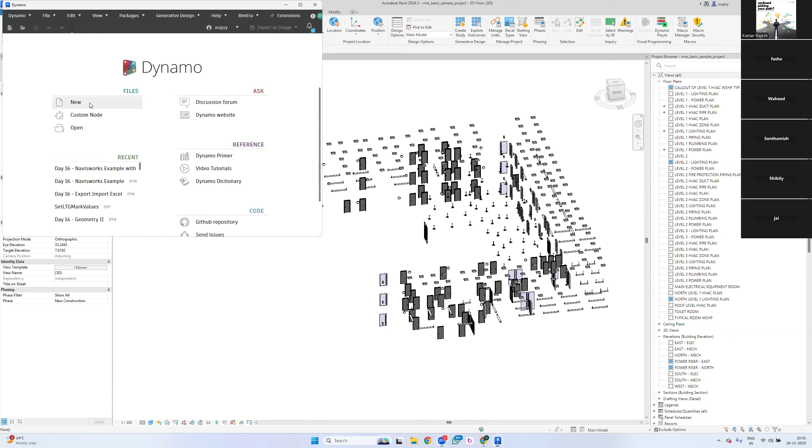If you realize what things can be exactly done with the help of Dynamo, you'll have that specific attention. This can be done with Dynamo, this can be done with the API. So where API is required, where

Dynamo is required. Today there is a person who texted me personally saying, Rajesh, I want to go with Dynamo and C Sharp. Arre baba, both are two different ways. They're not at all the same way.

If you really want to settle your career as an add-in developer, you no need to learn this Dynamo and other things. But if you want to settle in BIM as a BIM modeler and coordinator and then manager, and if you want to do all this kind of stuff, then if you want to be on the same tool, on the Revit tool, then you have to finish level 1 and level 2. If it really makes you more crazy about driving, writing the code, then you can go with level 3.

So this is my personal suggestion for everyone. The package is not exactly the same package what we expect for level 3 users. Level 3 is something completely different, handling 3-4 newborn babies at the same time. Just imagine, if you're a parent, if you're a father or a mother, consider handling 4 newborn babies at the same time.

What if I have DWG lines and convert them to Revit detail lines, I mean to Revit elements as well? For example, if I have a line, how to convert that line into walls? Like for example, even that was an add-in actually. This is an add-in, bro, the one we developed, it is an add-in. I mean, if one client comes to me and asks for

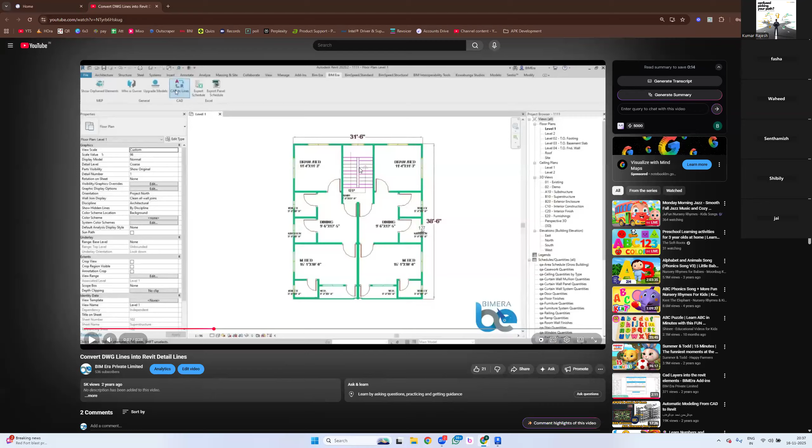Okay, so in BIMERA, these are the add-ons we have, and there are many. The base to develop the add-on is again Dynamo. Seriously, from the nodes I can see the C Sharp code and I can ask. That time we don't have any GPT.

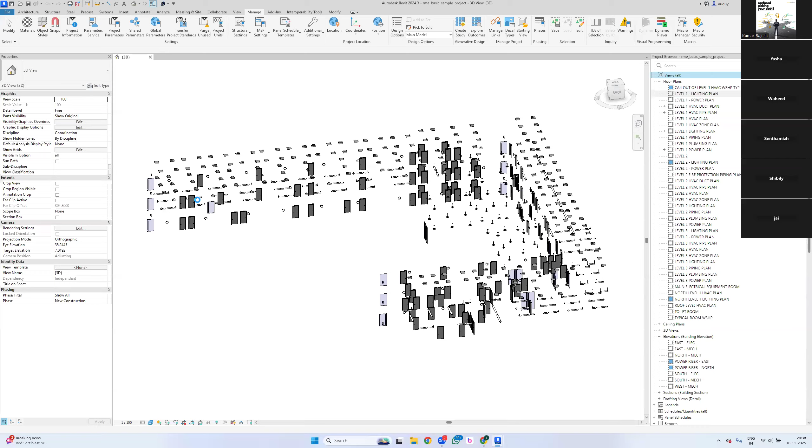Today I'm going to show some short example using API, I'm sorry, using AI, we are going to write some set of scripts. Okay, it's really simple, not that tough. Exporting panel schedules, and for example, if I want to convert something, let's say, how actually Dynamo is understanding.

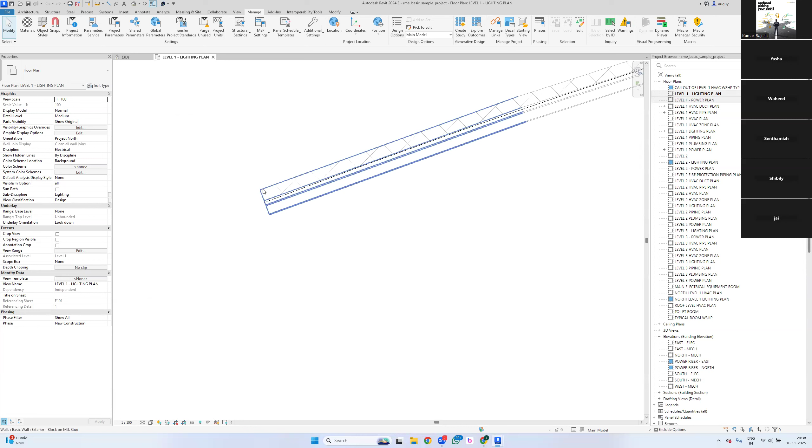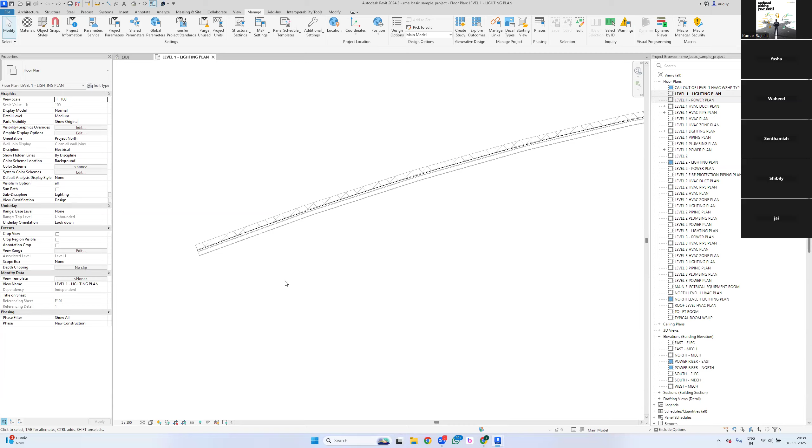Someone asked me, Rajesh, what if I have a curved wall? In 2021 it was not there, so what is the exact process? This part is just a wall, this part is another wall, and the base is actually a curve you can see in the back. That's a curve, seriously, done with the help of Dynamo with complete accuracy. If someone asked me, Rajesh, can you build the entire project from scratch with the help of automation, can you do this as a pilot project? Why not? Everything can be done, seriously.

Let me draw some lines here. There are lines, no? There are lines actually, see, these are just dummy lines.

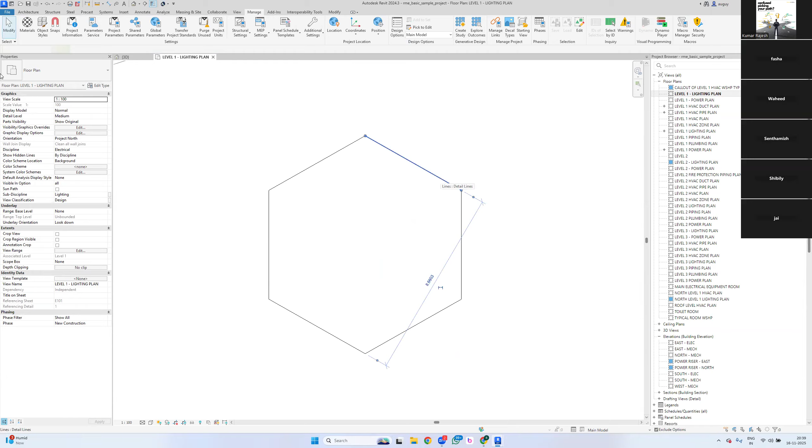Now I'm asking, try to understand what I mean. Dynamo is not a robotic science, even you can learn it yourself. But there are very wrong perceptions happening in the industry that Dynamo is very tough. That's why I explained yesterday, Dynamo is not tough. Today I'm going to show you why it is not tough.

Very simple. So I want to play with multiple model elements, and this process is actually called element selection. Element selection is a very important concept in the entire training because I don't want to disturb any other element apart from the ones I need. I mean, except I need only 10 elements out of 1000, so the rest of the 990 should not come into my context. Understand? So how do I exactly filter the 10 elements out of the 1000? That's what is called element selection.

It's very, very simple. It's very simple. At the same time, I mean, it is not simple. But the way I explain it, it's going to be very simple. So select model elements, it is asking me to pick, it's a manual selection, by the way.

Now, I know there is a process called Arre baba, Mr. Dynamo, I have lines actually, but it is in Revit. But I want to make something happen with you. So I want you to convert these lines into curves first. So element to, I mean, Revit to Dynamo transformation, again from Dynamo to Revit, again another transformation. So this concept is called element to geometry conversion, and geometry to element conversion. Understand, whatever it is, a line or a duct or tray or pipe with slopes, anything, same process.

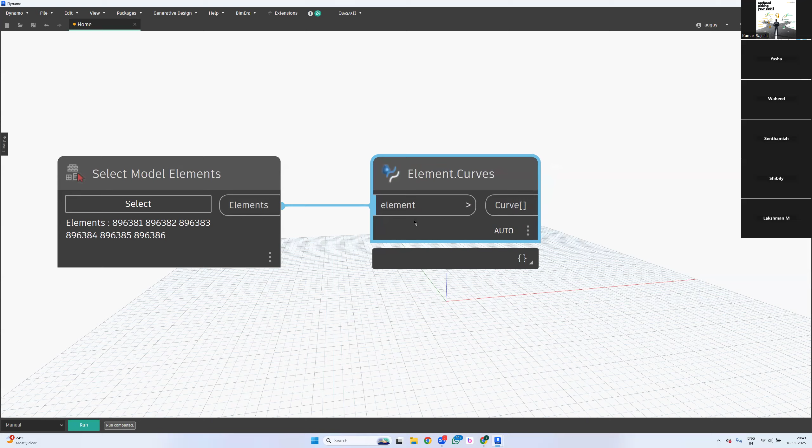Now see, I have curves now. So this is not a Revit element. I have asked to convert. I want to do some set of processes within Dynamo, and finally convert these curves into walls in Revit. So two sets of processes: element to geometry, geometry to element. Very typical process, you can't find my kind of explanation anywhere else.

The reason I can exactly teach you is I have learned six different languages. I'm good at six different languages to teach you, and the way I did in R&D, I generally don't sleep at nights. I don't have this kind of insomnia or something, but I don't sleep late nights. I mean, if I am eager to learn something, know something, this is okay.

So now what I'm saying, I just want to draw a wall, convert a wall, but I know, I have the curves. I have the curve and I know the height. See what it is exactly saying.

So whenever you started typing 'by', consider you are creating something. Even Dynamo will understand, okay, this guy is about to create something. So it will show every damn thing which creates. That is the power of searching by.

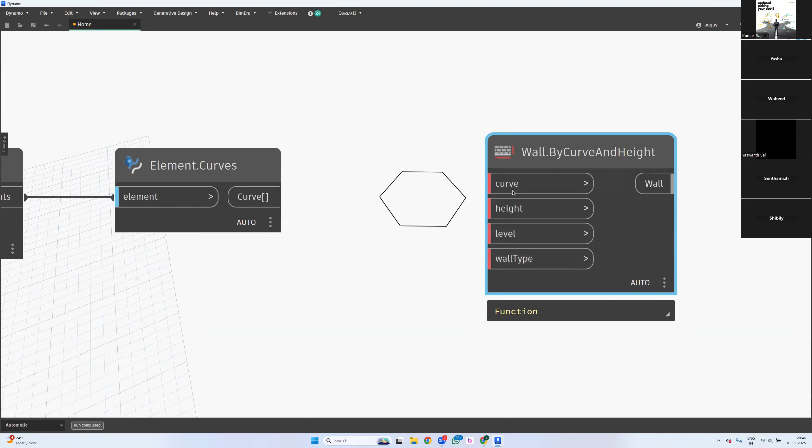So by curve and height, it means I know the curve, I know the height, I know at what level it has to be, I know what wall type it's supposed to be placed. So I know the curves. So what it is exactly, I have curves. So can I connect this to this?

So from, can I connect this to this or this or this or this? To where curves, I have to connect to the curve. The reason it is actually returning the curves, but it is expecting the curves at the same time.

Is it? Is that really a rocket science? No, no, correct, very simple. If your kid is expecting ice cream, bro, and you bring some sweet, chocolate or something, does she accept it? No. The same way, so this is it.

It contains like 10 lines of code. It contains like 90 lines of code. So to make this execute 90 lines of code, you have to connect that exact pair. I hope you know the puzzle kind of stuff.

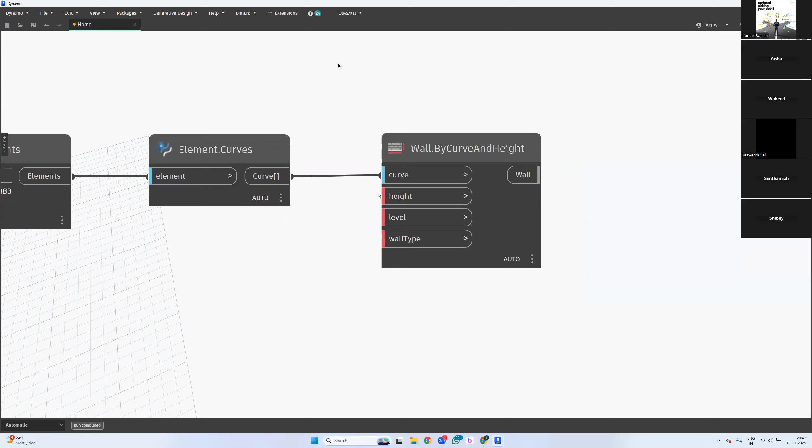Okay, fine, so height actually. So I know height. The only problem with this is actually we don't understand. We know what this is expecting. We can understand by reading it.

You did some sort of research very well. You have gone through some YouTube videos or Udemy videos. You finished like 2 or 3 courses from Udemy also. I can tell you this, it's a confidential thing, but still I can say most of my students are Udemy users. Seriously, they've gone through already, but no luck, because they don't teach concepts.

They teach scripts. If you learn a script, you will be able to play with only that script, not the concept. Understand? If you have seen how to build a bridge in just 1 minute, or 2 minutes, or 2 hours, or 3 hours, you can do the same thing. In the interview, if they ask you to create a tunnel, no, you can't, because you practiced a bridge only. Is it clear? But what if exactly to create a bridge, what are the things required? Root concepts.

The root concepts, at least you will finish 80% of the things if you have the root concepts. Understand? So don't be more foolish when you're learning these kinds of stuff. Don't waste your time, because I was a big fool, seriously. Even though I invested a lot, my investments were always on the wrong track because someone said this. Again I went and invested in learning a new course, another course. This is the way it went completely. So I don't want to do those mistakes. Seriously, if someone comes to me and asks, can I go with this?

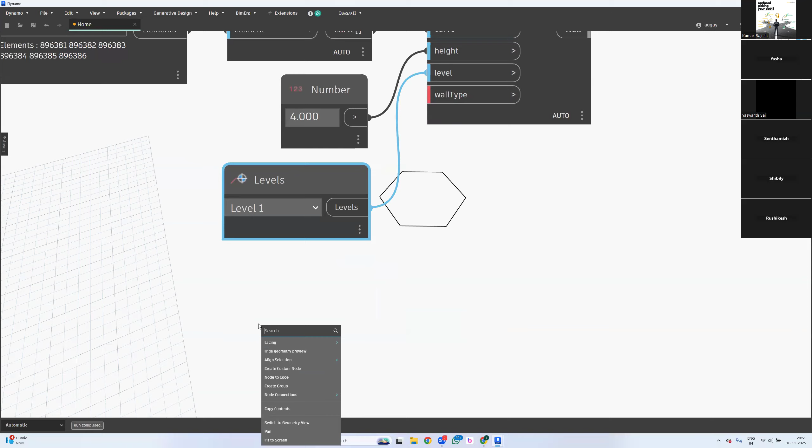There are a number of ways again. Levels. I tried this method, I'll pick level 1 and connect this to this. And this is expecting wall type. Pick a wall type. I'll just follow MW 17.5 and connect this to this.

Done. So it was expecting something like curve, height, level, and wall type. Now in return it shows... what happened here? What are these?

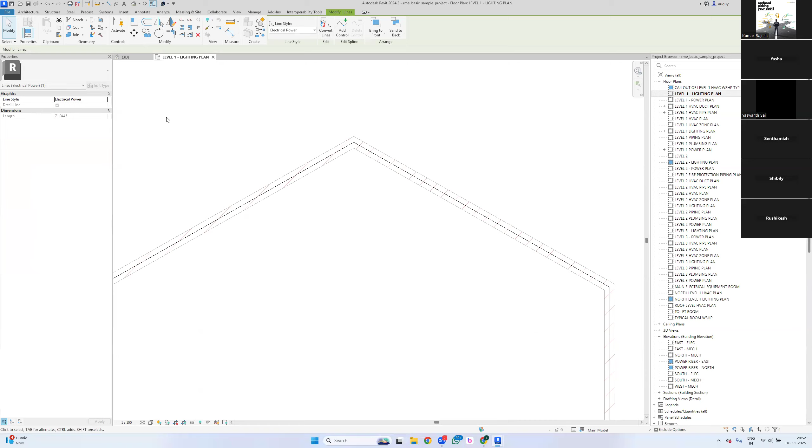Element IDs of all these walls. Hit escape, the coordination mode. This is a curve and this is the wall, and the height of this is unconnected 4 meter, and that is MW 17.5. Are you clear, everyone?

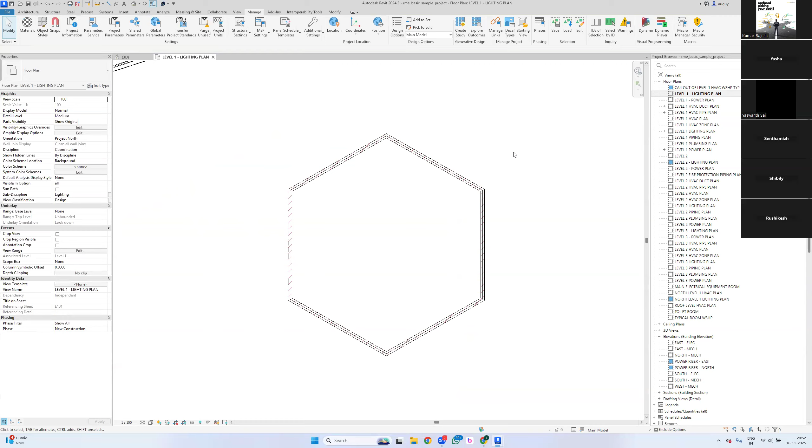Are you clear everyone? What if I have lines only but coming from a CAD file? Same process. What if I have the curves? I want to draw a duct.

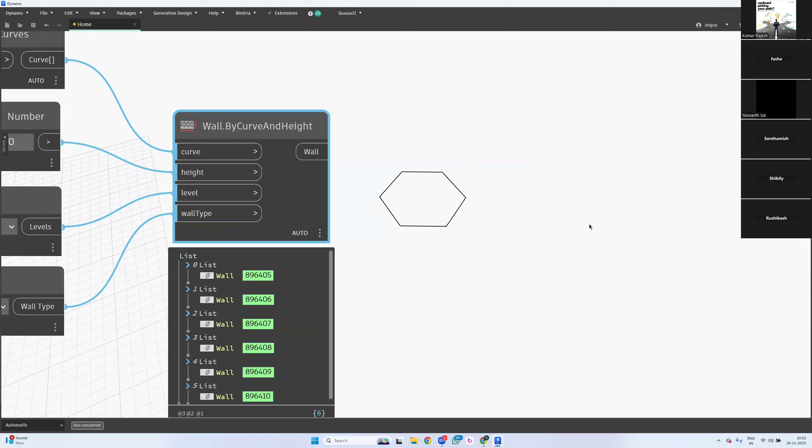Very simple. Duct dot by curve. Duct rectangular by lines. What is it expecting? Same repeated stuff, nothing else.

Because if you have seen something for the first time, you'll definitely get scared. But if you keep seeing the same stuff with different data, you lose that scariness. If you see a ghost for the first time and you feel it's going to harm you, but if it just comes and sits beside you, doesn't pamper you or do anything, just observes what you're doing, next time if it comes, do you really get scared? No. Of course generally they won't do such things, it's just an example. But you won't be scared when you see something for the second time. So even Dynamo is such a thing, bro, seriously. It looks scary, but if you understand the concepts behind it, it's very simple.

So what is it expecting? Lines and curves are nothing but anything. I'll just pick this lines. Oh, duct type, here it's expecting wall type, here it's expecting duct type. For ducts, there must be a mechanical system type, correct? There must be a mechanical system type.

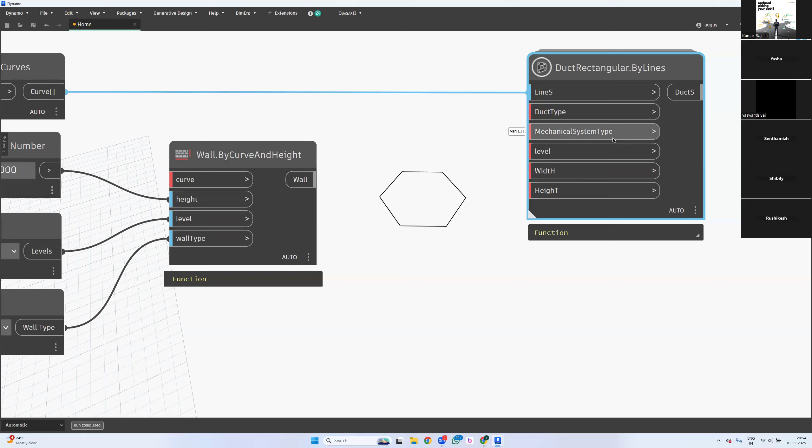So I have to connect the mechanical system type, same as this drop down. And level, same level node again. I'll connect this. Width.

When you hover the cursor, of course it isn't saying anything, but we have to apply some common sense. Width generally in the number format, so I have to connect a number. For what? For the duct. Duct has a width and height, so 400 into 400 or 300 into 300 or something. Am I right, guys?

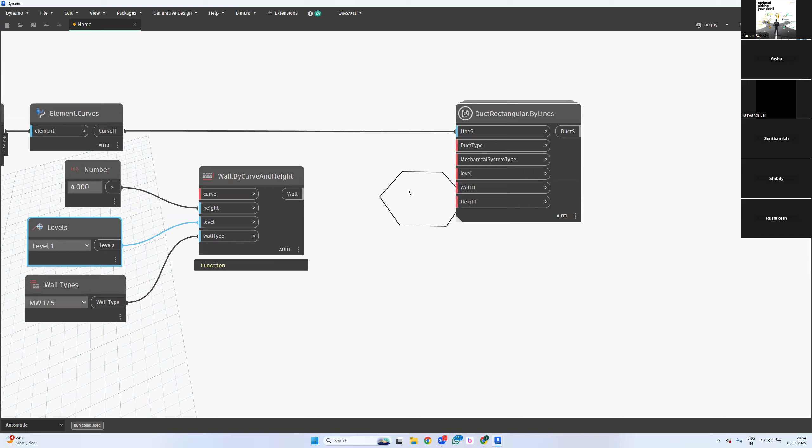Yes. So can I convert the lines into ducts easily? Same. What if, trace, oh, cable tray. Same thing again, tray by curve. Again same stuff, where is the cable tray line? Where is the cable tray element?

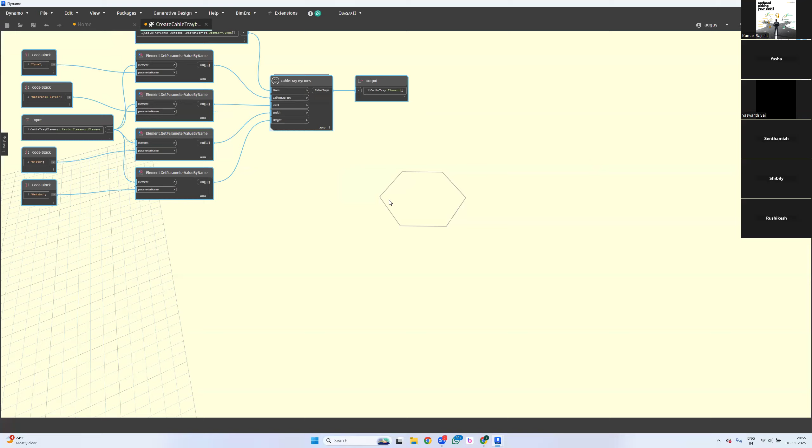Here there is a problem, this is not asking for a width and height. So if you double click on this, it will take you to a different yellow color background. Yellow interface, okay, so here you have to adjust the width and height, whatever you need. And the base is cable tray dot by lines.

Copy it, copy it, and paste it. Simple, see, you can try the same stuff with lines.

Cable tray type, level, width, height. What's wrong in it? Similar. Isn't it? Doesn't it really look kind of scary, bro?

Nothing, okay. The only reason I generally suggest, if you're my student, is to exactly follow the way I'm assigning you the tasks and R&D, no other R&D required. I don't let you do your own personal and idiotic R&D. You have to exactly follow me if you really want to become another me. Understand? Okay, if you really want to write such stuff, okay, very very simple, Dynamo. I don't want to scare you, and there are no other tutors who can teach like me. I don't tell you all this stuff, but frankly, it is true.

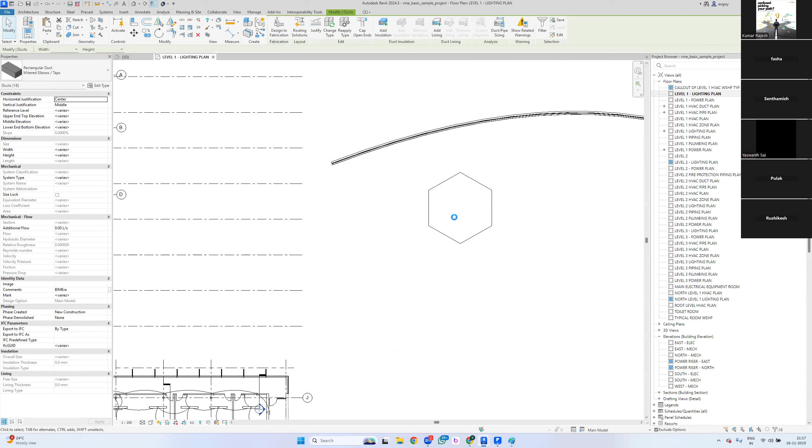What if I want to pick all those stuff? Very simple, Select in Revit again. Something like connect this to this. If I go and check, it shows like 18 elements got selected.

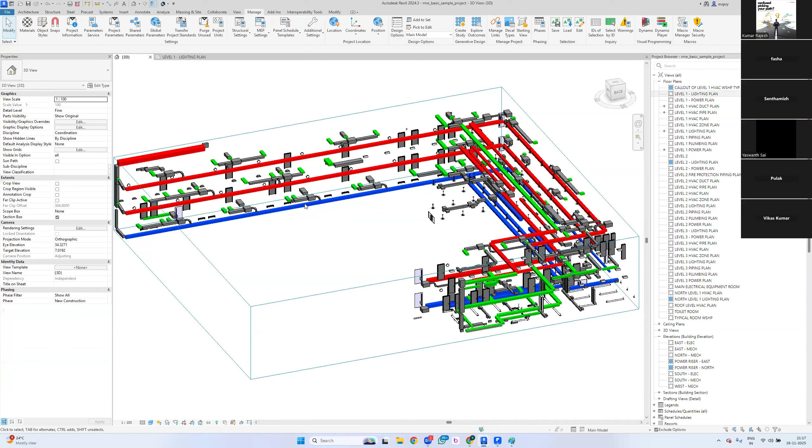What if I just simply click on selection box? I see those. What if I simply connect to this? So there's 18. I can see these are the only ducts we have.

So for these ducts, I just want to split it into two parts or three parts, or else I just want to place the wall duct supports. If it is about 7 meters, I mean exactly 3.5, 3.5, or else like 4.5, 4.5. This is the way I just have to play something.

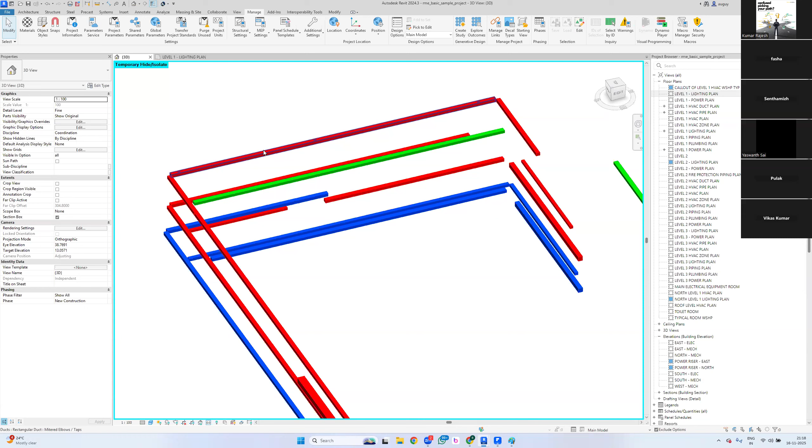So these kinds of things can be done, and this is what is called dot notation. It's not at all complicated. I'll just show you some dummy example. Archilab.core.datetimes. If I want to access this Archilab.core.datetimes.fromUnixtime, that's it. That is what dot notation is.

There are, I mean, it's just I'm explaining you to make you understand. It is simple the way it is, but the same concept has to be explained for almost like 6 hours. It means just try to understand how deep I'm actually teaching into this.

Okay, custom node. You can create your own custom nodes for no reason. For example, I just want to convert this into a custom node. Very simple. If I want to convert this entire thing into a custom node, how do I do that?

How do I do that? Control C, file - in a matter of just a minute, not even a minute, I can create myself another set of nodes like this. Seriously, just file, new, see custom node. So, get ducts for duct supports or something. It's up to you the way you name it.

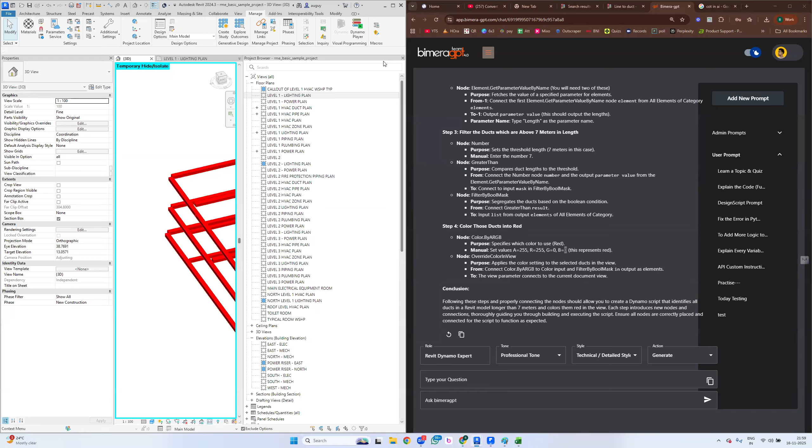When I connect this, all those elements - there are total 32 elements - now they are in red color. Guys, do you see that?

What if I change this to blue? I would love to change this to green, and this to this - I'll go and check. Now they are in green color. Guys, are you clear? Yes, sir.

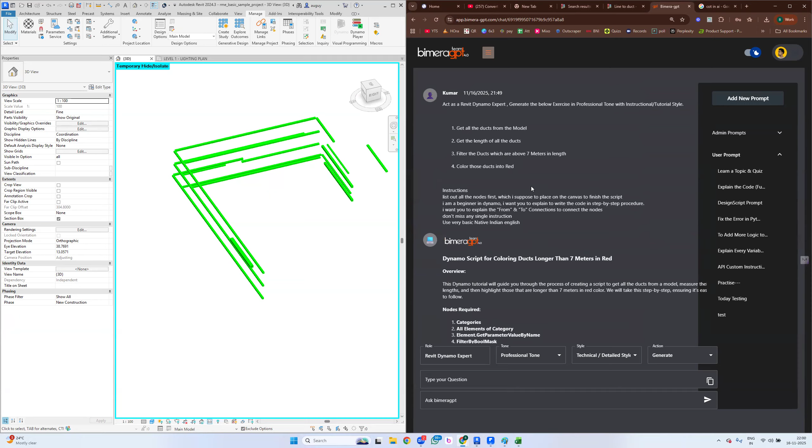We can simply follow the instructions it's giving me - nothing, but of course it will take a lot of time. I could explain the same concept for 2 hours, so the same content cannot be explained in just 10-15 minutes. I hope you understand, because what the exact prompt engineering and LLM models are, how it exactly works - I'll show some AI examples and all that stuff.

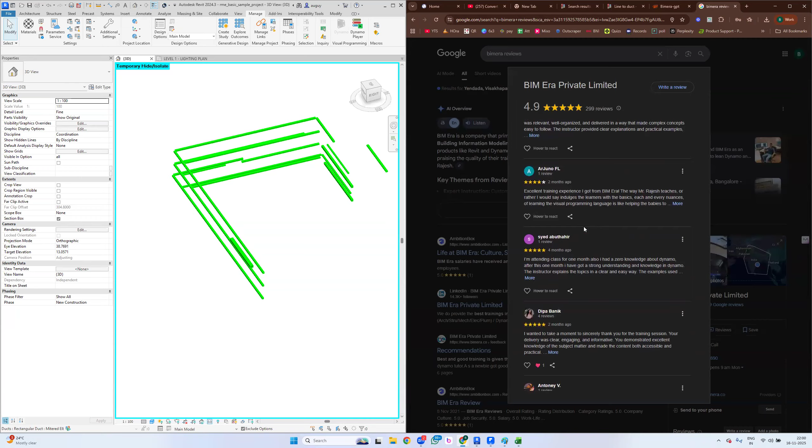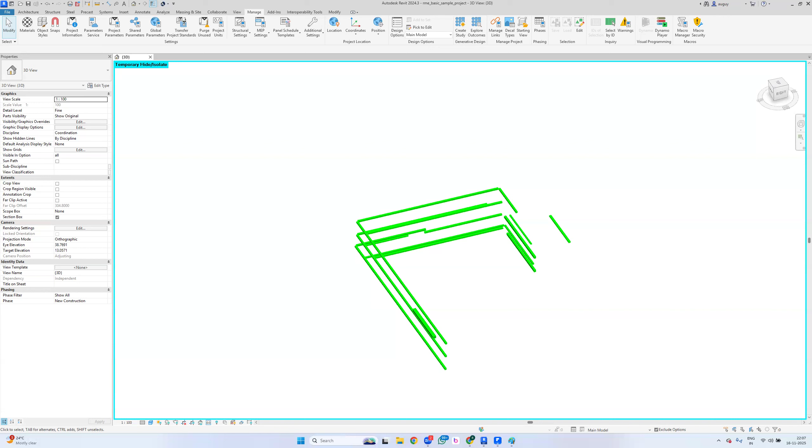Tell me, Patra. Actually, I just went through your posts from yesterday and today. I'm working in the architecture domain, complete architecture. I'm a BIM manager working in the architecture domain, so I'm just looking for automations. I tried to find some of your students who already completed from there.

I think you might have known Santosh Chavan, right? That was long back. Yeah, long back. Through him, when he started joining that time, he told me, but then I didn't get time to join. Now I got the chance to join.

My question here is, in the architecture domain, whatever automation is going to be used in future, that will be helpful for me. I want to join the course, that is one thing I'm looking for. Come on, continue, finish your point first.

How am I going to use this for architectural things, because I'm working from a BIM manager and BIM coordinator point of view. I'm working in Bangalore, so that is one thing. Second thing, like fee structure, whatever fee structure you're telling for level one, two, three - do all three need to be paid at a time, and what is the total cost for all three?

No, no, don't look at level 3 for now. I generally don't suggest anyone that. Frankly, the reason is I have trained almost 2,500 candidates on Dynamo. When it comes to API, consider it's around 1800 plus. But when it comes to level 3, not even hardly 100, 150. Why? That is because of coding things - very complicated coding knowledge, and it's very expensive as well. And if I started teaching level 3, if you don't have experience on level 2, you will not join from the third day.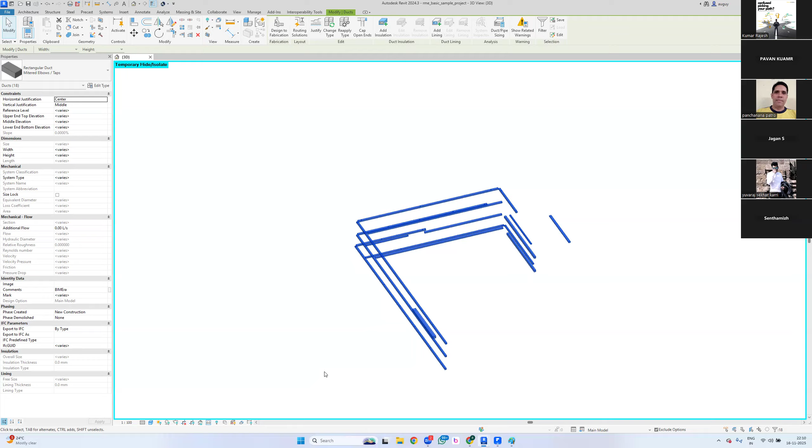No, so for day-to-day basis, what I feel is level one, two is enough to do this. I think whatever's more than enough, Dynamo is there, all internally built, so tricks can be enough. Okay, so what will be the cost for one and two? Level 1 is actually 25,000, level 2 is actually 35,000 - 25, 35, so it costs 60. But if you go with the combo, level 1 and level 2 at the same time, it'll be 45K. Okay, both will be 45K.

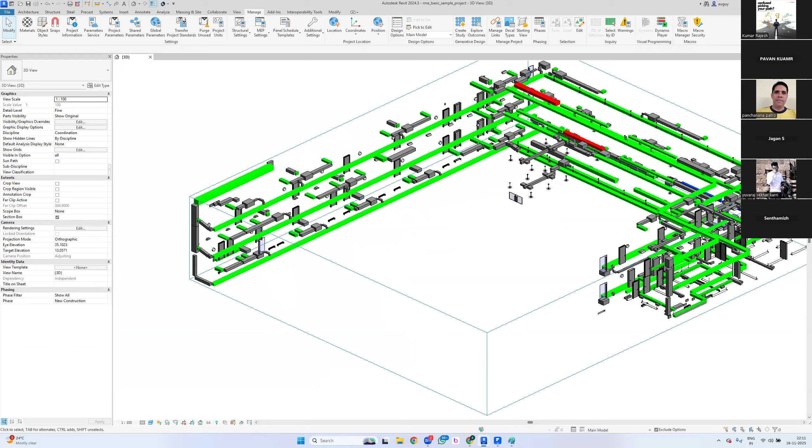This is because I don't think how we can take it further immediately - that's not going to happen also. I'll just understand the concept at least, so that is one way.

And these things, whatever Dynamo - is that helpful for us for Navisworks work culture? Yes, we have Navisworks as well. See, if you have any Navis file, it's going to get everything, so you just have to connect the particular node and it's going to give you each and every single thing from Navis. Yes, because that also needs to be done - I just thought of it as a BIM manager or coordinator point of view. Navisworks is quite critical nowadays, so I thought I could link that.

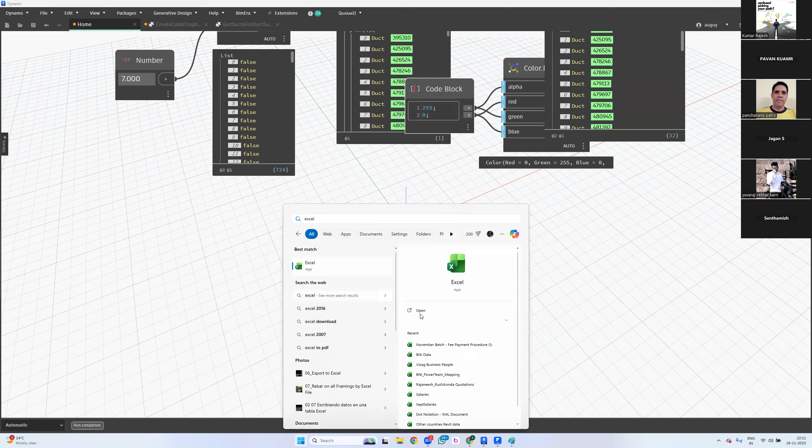So this is a small doubt I had, but once I join, definitely a lot of questions will come about whatever you teach over the last 2 days - there are a lot of things there. We understood, yes, but end of the day, if we ask questions again, definitely so many things will be new for us, right? Completely new only, right? That's what I believe, but it's okay, that is a good thought - at least you give direction to start up. So I'll think about the time required for me, and if required, I'll get back to you directly, personally. Sure.

Thank you. Yeah, great, great. Nice talking to you.

Come on, anyone else? Rajesh, Ramu here from Bangalore. What might be the duration for this Level 1 to Level 2?

Level 1 actually takes 30 days, that's more than enough. But I'm sure once the new batch starts, these guys are going to harass me, and I'm habituated to everyone's harassment. Just imagine if 50-60 people are harassing at the same time, can someone handle it? No. So that harassment takes another 15 days. Total 45 days, only for Level 1.

And after Level 1, you'll have a break again, because I want you to see what happened. Before learning Level 2, you should know why you have to learn it. Because in this 30 or 45 days, you will play with Dynamo and you will definitely get irritated, because as I stated yesterday, Dynamo is limited, not unlimited. If you find the node, then you can automate it. If you can't find the node, there's no other option, you have to sit and write it.

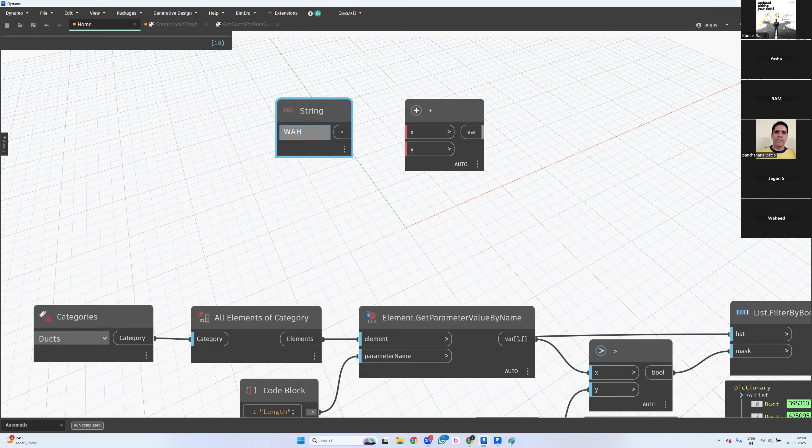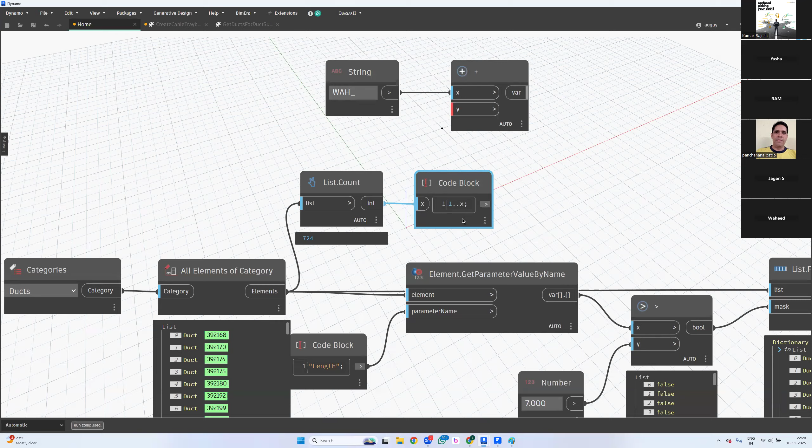WAH underscore connect this, and I have total 724 elements. Forget about what are there exactly. So list dot count, I'll just connect the count to this. I have 724, I'm asking to print 1 to x value, and x is going to be like 724. Connect this to this, and I have some WAH underscore 1, and set parameter by name. I have all these elements, and the parameter name is going to be like mark or something.

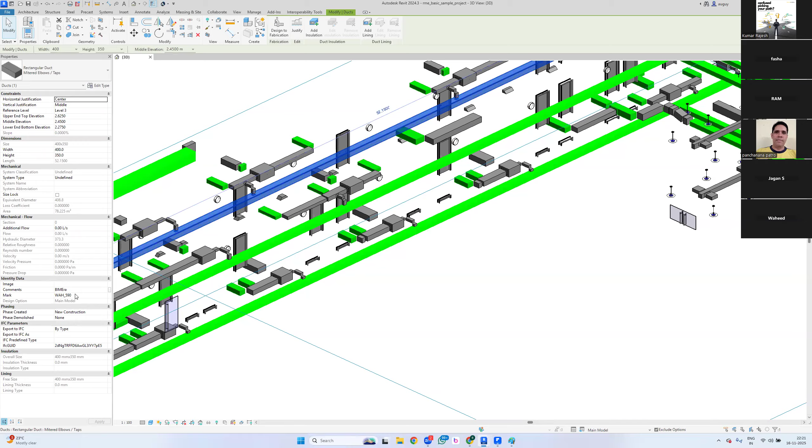Connect these values to this. So for all the 724 ducts, I can see WH — I can see WAH 590, 330, 661. This is what we exactly do for BIM data.

In COBie, we have BIM and non-BIM. Exactly we implement the same strategy for writing the data accurately. And you can't see more than 724 because WAH 1 to WAH 724.

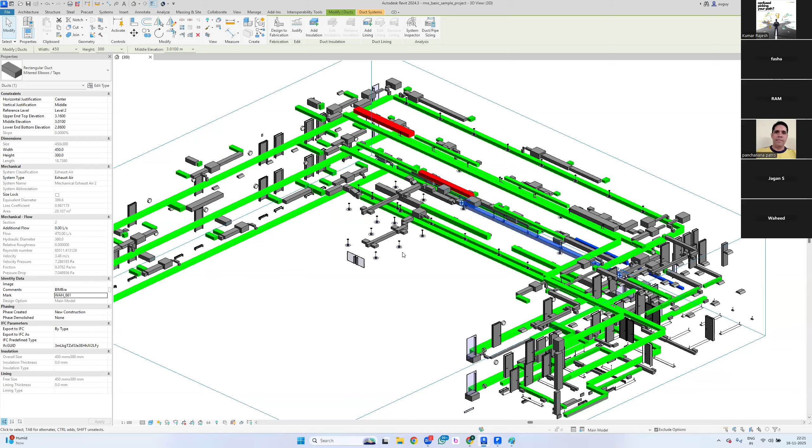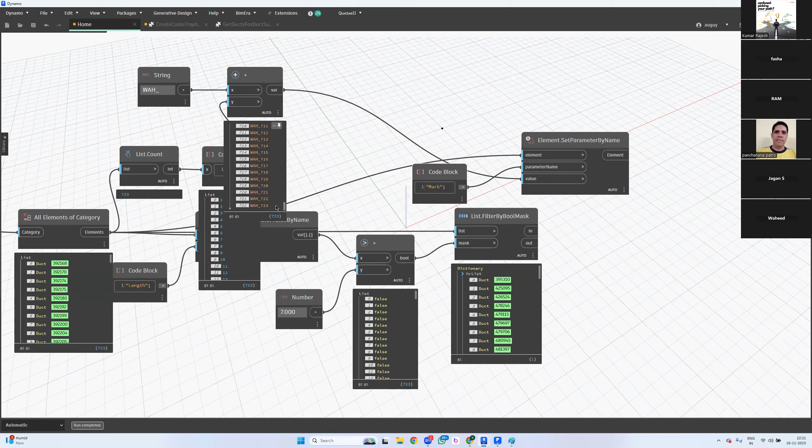If, for example, I delete this element, what is the ID of this 330? What if I just simply deleted this and deleted this again? Okay, now how many items is it supposed to be there? 723. So if I see the maximum number in Dynamo, it is 723. It means it has already reset — I mean it has deleted.

I deleted an element and the script has changed the existing number. If I deleted 330, now the 331 is 330, 332 is 331. Are you clear now? So this is how it exactly works.

Okay, so these are very basic stuff. You can do it within the fourth, fifth day itself — fourth or fifth day of training. You don't need to wait for the whole 45 days of training. Clear?

Okay, but how to know which node I can use for this? I'll explain that, that comes under the node finding concept. I'll explain in the training, don't worry. Come on, any other questions?

Okay, so it's time to leave. Thank you for — I mean, are you serious? You don't have any questions to ask? Come on.

Okay fine, okay, you guys are like men, bro. Why we have to — you know, I'm like your brother. Okay fine, see you, and if you're interested, do text me.